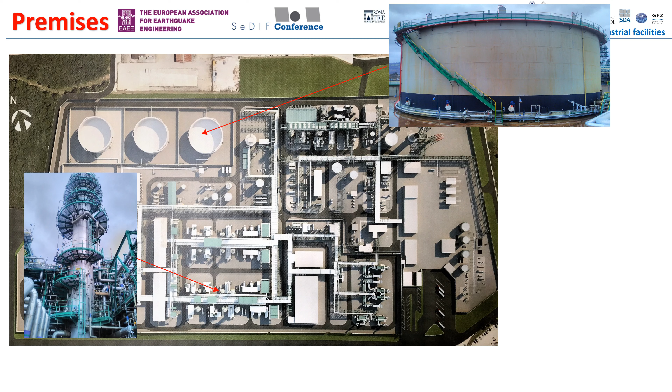Let me introduce the main critical components of a hazardous plant. We have mainly storage tanks, in which most of the oil and derivatives are stored. Then we have columns, typically used to separate oil into several components using chemical and physical reactions. We have also horizontal vessels in which oil and derivatives are stored and modified. Then we have torches and flares as part of emergency operations. We have a lot of supported equipment, like the one in the pictures, heat exchangers, but many others. And finally we have hundreds of miles of pipes that transfer oil and gas between different equipment.

This type of plant has shown in the past very high vulnerability against Na-Tech events, accidents, the so-called technological events triggered by natural hazards. Even though the percentage of accidents caused by earthquakes could appear limited, 8% in the pictures, that comes from a well-known database, MHIDAS.

But the consequences in terms of economic losses, direct and indirect, and fatalities could be extremely high. For example, during the Kocaeli earthquake, we had significant structural damage in several industrial installations. The most famous one is the Tupras refinery, where we had damage in the plant itself and the associated tank farms with crude oil, where multiple fires occurred.

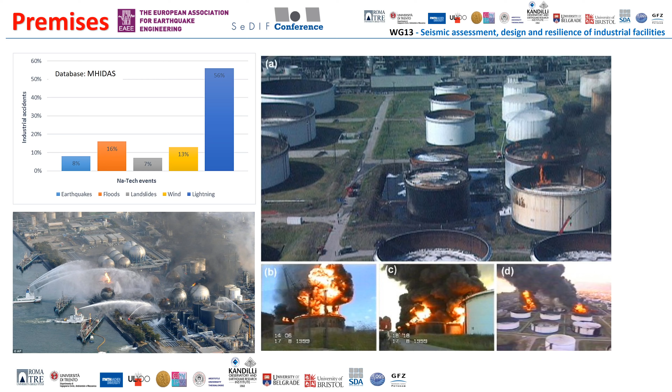According to a questionnaire survey by the Fire and Disaster Management Agency, facilities damaged by the 2011 Tohoku earthquake in Japan amount to more than 3,000. This is about 2% of the total surveyed hazardous materials facilities in the East Japan area.

They had 1,400 hazmat facilities damaged by strong motion, and about 2,000 hazmat facilities damaged by tsunami effects. Fire occurred in 42 facilities, with oil leakage occurring in more than 120 facilities, like in the pictures. This is the most famous accident, which occurred in the Chiba refinery during the earthquake.

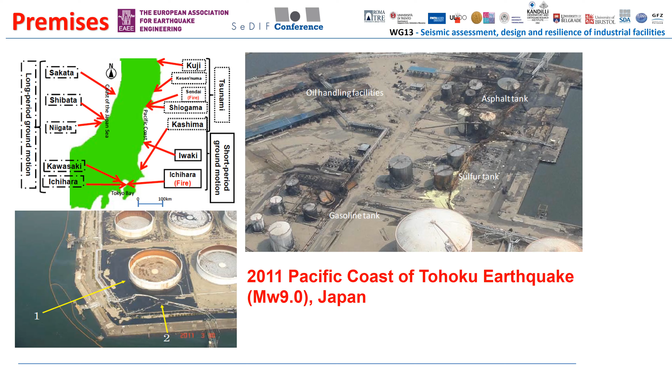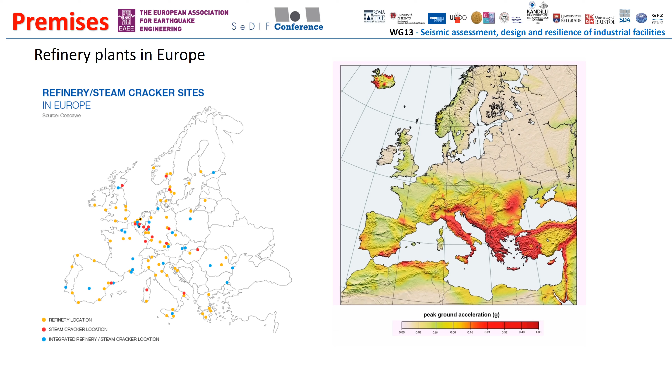But what about Europe? European regulations impose the control of major accident hazards in industrial plants with the European Seveso III directive, the 18th of 2012, in which risk analysis and prevention methods are required, also in the case of Na-Tech events, and the earthquake is explicitly mentioned.

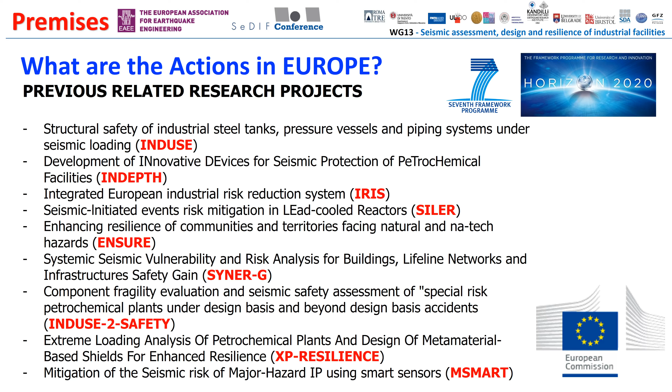For these reasons, this group of volunteers joined in a working group with the aim to fill this gap. This working group is called Seismic Assessment, Design and Resilience of Industrial Facilities, and is the 13th working group of the European Association for Earthquake Engineering.

Let me introduce the working group. It is composed of 11 partners, even though it is rapidly growing, and soon we will have a couple of additional partners. I'm the chairman, and I'm honored to have as vice chair Professor Christoph Butenweg, whom I thank so much for the invitation to this conference.

As you can see, we have many universities across Europe that will provide very important contributions. This working group is limited to non-nuclear industrial facilities, as I told you before. However, let's say existing guidelines and concepts already successfully implemented in nuclear power plants could be considered.

These are the main goals of the group. The group intends to offer the scientific and professional community a clear overview of the problems, viable solutions and tools. We have many experts in different fields: seismology, earthquake engineering, resilience, Na-Tech risk. This working group will be a good occasion to familiarize with this important topic and be in contact with the community working on industrial plants and the consequences of seismic events.

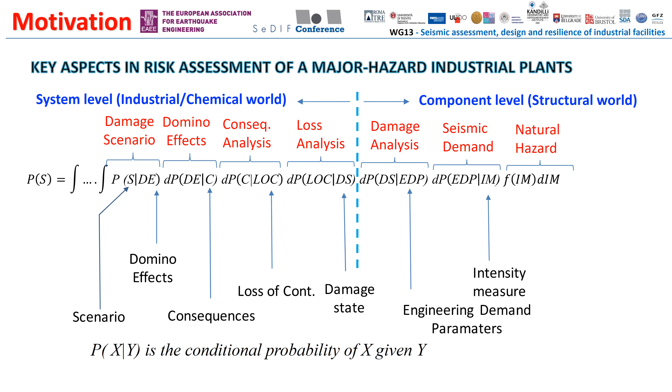As you can see, we have mainly two worlds that need to communicate: the structural world and the industrial chemical world, which often find it difficult to exchange experience in this field. I call this the communication problem, because in this framework we can really recognize a communication problem. We have technical communities with different backgrounds, practices, and perspectives, and the interaction between micro, meso, and macro scale needs to be captured.

This needs to be captured at the component level and the system level. Typically, meso-macro scale is for geologists and civil engineers, micro and meso scales are for structural engineering, and meso-macro scale is mostly for chemical engineers, but these have to be merged in some way. At the component level, methods mainly for structural engineering are required under the seismic point of view, and at the system level, methods for process plant safety analysis are required, including the community, of course.

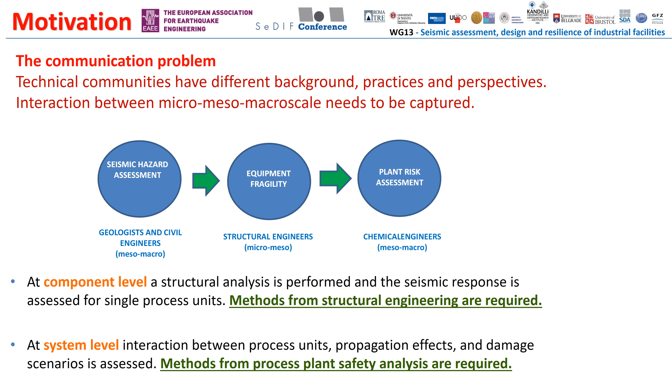To better understand the main issues in the risk analysis of hazardous industrial plants, like petrochemical plants, let's consider a nuclear power plant, which is different. As well known, in the case of a nuclear power plant, the risk is mainly governed by main events, the core melt, and it is enough to use a fault tree to identify the main critical components that contribute to the generation of the accident and mitigate the risk in this way.

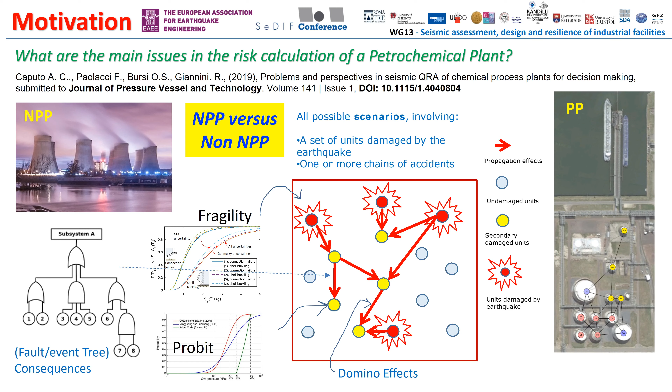So in this respect, phasing up the problem using a multiple level approach appears rather suitable, but really difficult. For each element, the effect of damage propagation can be determined by using specific event trees for each source and target unit, along with models for determination of physical effects, thermal radiation, and overpressure, which are more related to the chemical and industrial worlds, to derive the related consequences.

In all the slides, I suggested some readings that can help you to follow and to understand better details on this page.

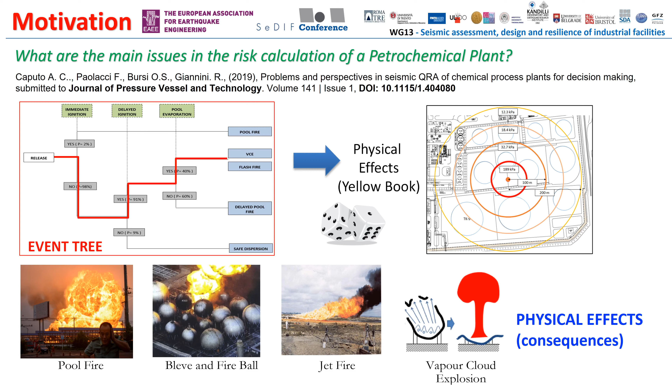For this reason, the working group decided to activate several research thrusts that are listed in the next two slides. As you can see, we have seismic hazard, seismic design procedures for special structural components, considering also the dynamic interaction between primary and secondary elements like pipes, vessels, pumps, tanks. We need to improve the seismic codes and standards related to industrial facilities, and also work within the performance-based design concept for industrial facilities.

Then we have vulnerability analysis with the development of fragility curves and probabilistic risk assessment of components, often multi-components, elevated tanks or pipes and so on. We also have the idea to propose innovative passive-active seismic protections for facilities and installations, including new or novel proposals like meta-foundations, for example.

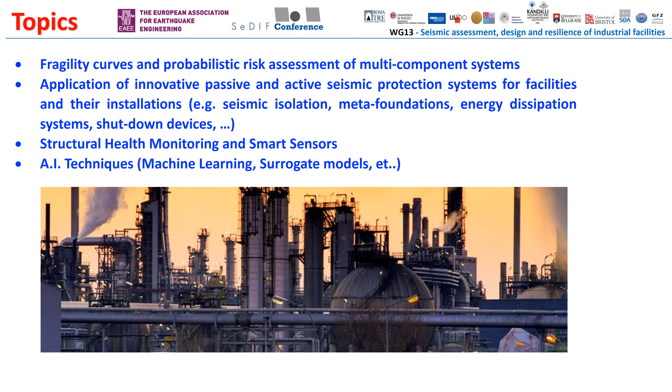We also have the idea to use structural monitoring and smart sensors to mitigate the risk. In doing this, for the evaluation of risk and resilience, we also have in mind to apply artificial intelligence techniques like machine learning, surrogate models, and so on. In the next nine slides, I will briefly describe some of these topics and the main related issues, which you can also find in detail in the recorded references for each slide.

The recent introduction of consequence classes in the new version of Eurocode 8 is a positive beginning, but we need more effort in this respect.

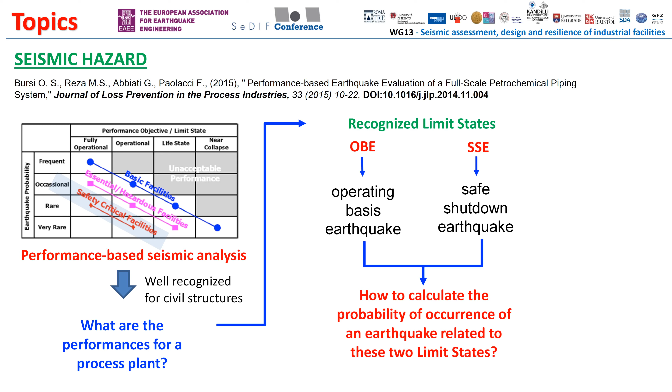The performance-based approach that is nowadays well recognized and used in civil engineering, in industrial engineering is rarely adopted still, with the allowable stress design approach being the most used one. One of the difficulties is to identify the damage conditions and quantify the related limit states. In addition, typical critical fittings like pipe flanges and elbows are usually over-designed, and the need to rethink the design procedure appears necessary.

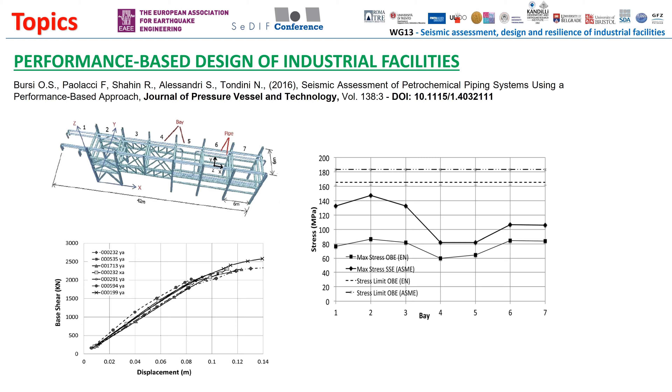Another strategic topic concerns the response of secondary elements like pipes and tanks, which is of paramount importance, and there are very few contributions on this.

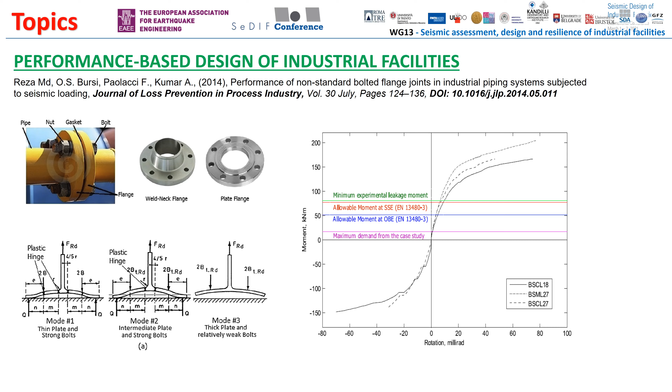For example, a recent shaking table test at the Eucentre laboratory in Pavia was performed on a component system: a pipe frame plus pipe plus tank. Many interesting aspects emerged, including the identification of limit states, floor response, spectral identifications, and so on. We are still working on this, but we receive positive feedback from the scientific community, and we are encouraged to go ahead.

This has been developed within the SERA project, the Seismology and Earthquake Engineering Research Infrastructure Alliance for Europe, in which many other important research projects have been developed.

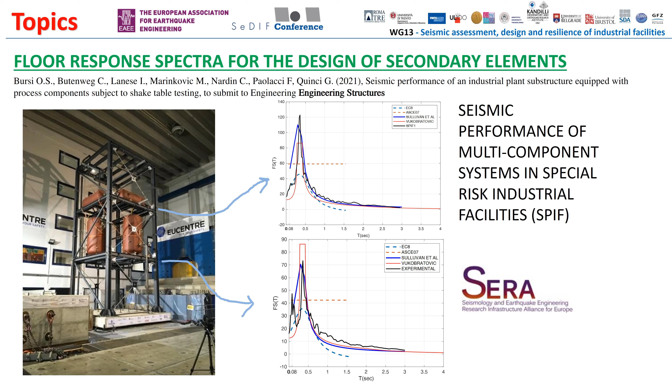The fragility analysis of industrial equipment is another topic that has been highly investigated in the literature, especially for storage tanks, as you know, but many other equipment need to be analyzed. Moreover, an investigation on fragility curves in terms of loss of containment appears necessary for consequence analysis. But as before, very few contributions were found in the literature, and more effort is needed.

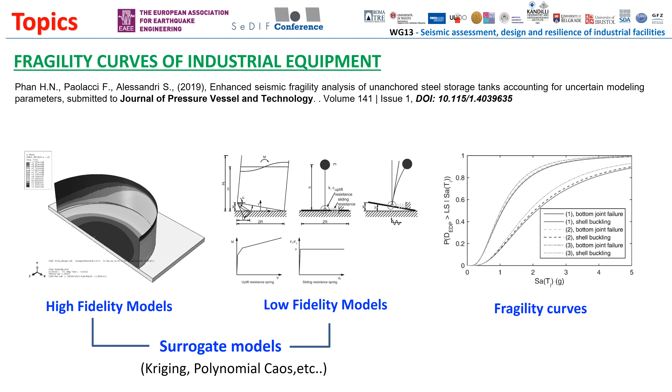Another good example of fragility analysis of storage tanks has recently investigated the effect of floating roofs. In this respect, more effort is needed, given that past earthquakes demonstrated the dangerous effects that excessive sloshing of a floating roof can cause to storage tanks. We can mention, for example, the Kocaeli earthquake, where, as I showed you before, most of the damage was caused by excessive sloshing of the floating roof.

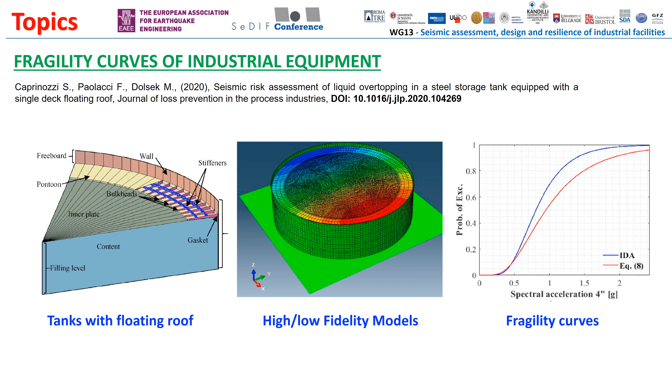But many aspects need to be clarified. For example, what risk measures would be used? Economic losses, fatalities, or what? These are questions that are waiting for answers, and this working group wants to work in this direction.

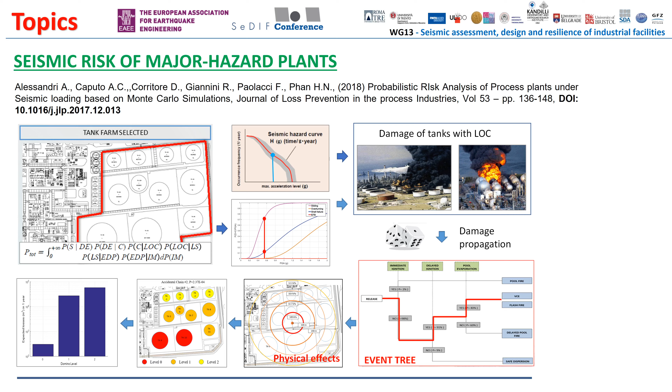However, the extension to the resilient community appears of paramount importance, and there are no contributions on this subject, or at least we have not found any yet. Of course, the interest of industry and insurance on resilience is, in my opinion, well recognized and is surely waiting an answer. But this topic needs to be well developed in the future, because very few contributions have been proposed, as I told you before.

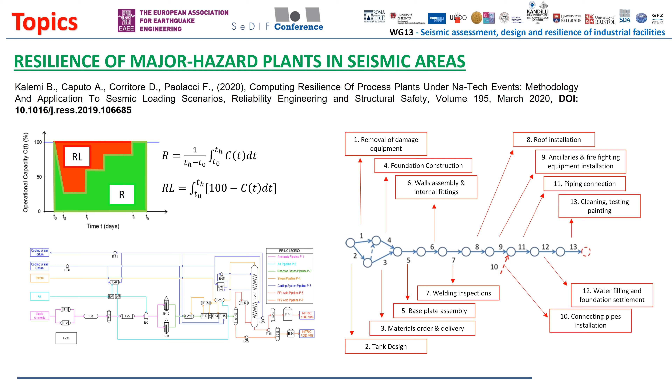In this respect, for example, what are the right resilience metrics? Economic losses, direct or indirect, fatalities within the plant or in the community? These and many other answers need to be provided, and long-lasting research activity on this subject appears on the horizon. This is my opinion, the opinion of the working group that I chair.

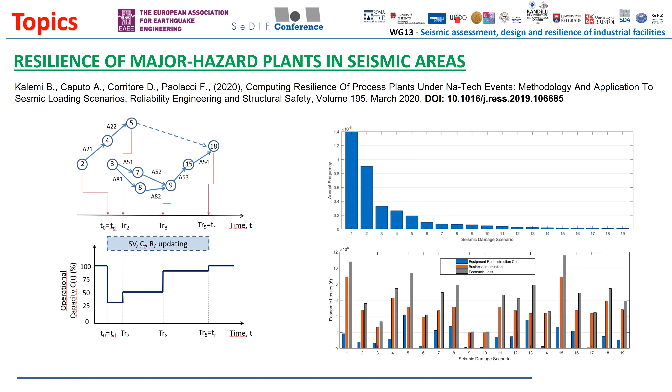Basically, we want to prepare preliminary guidelines for seismic assessment of industrial facilities as a foundation of the design code at the European level. We want to spread knowledge through workshops, seminars, and tutorials in collaboration with other associations like ASME Pressure Vessel and Piping Division, the Japanese Association of Earthquake Engineering, or the Pacific Earthquake Engineering Research Center. Some of these collaborations have already started.

We want to promote public events for the discussion of these previously shown aspects, and we want to organize special sessions at key conferences, especially at the European level but also worldwide. The SeDIF conference is a very important conference in this respect, and I would like to thank the organizers very much for this occasion. Finally, we want to promote projects within European research programs in the field of infrastructure risk and resilience.